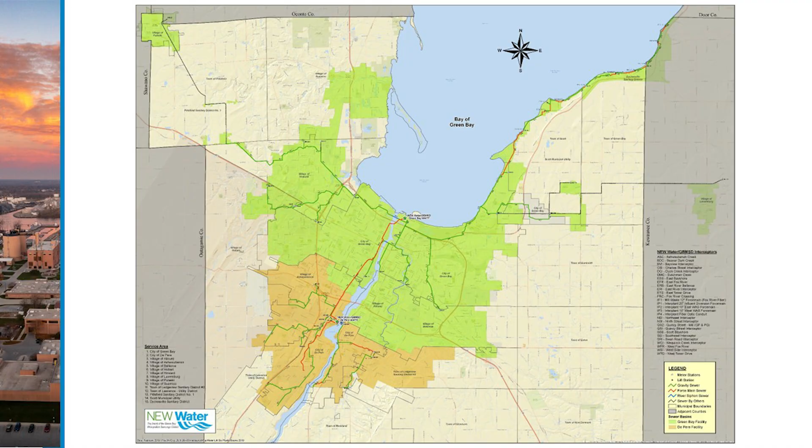So we have 2 wastewater treatment facilities. One is in Green Bay. It's right at the mouth of the Fox River near Bay Beach Road, close to Bay Beach Amusement Park. And then the other is in De Pere. It's between Brown County Fairgrounds and Ashwaubenon Park. The green area is the service area for the Green Bay facility. So it conveys the wastewater to that treatment plant in the city of Green Bay. And then in orange is the area that goes to the De Pere treatment facility.

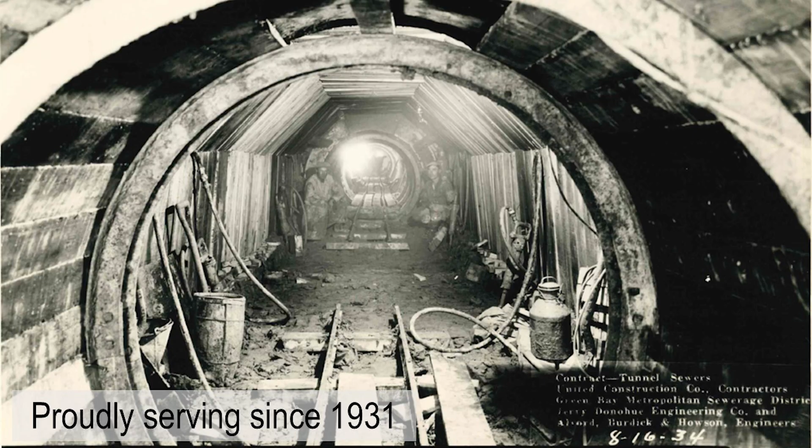So we've been serving this community since we were formed in 1931. And the pipes that we're talking about rehabilitating have been serving almost that entire time. Most of these pipes were constructed in the 1930s. We serve the families, businesses, industries, commercial entities in this area. We do it around the clock, 24/7, 365, despite the weather, and are really focused on the environment and making sure we convey that wastewater, treat it, return it to the environment, meeting our wastewater discharge permit.

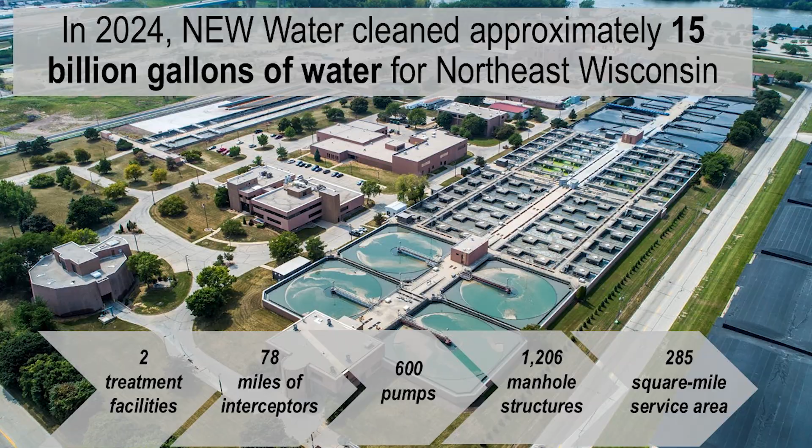So we mentioned the 2 treatment facilities. There's 78 miles of pipes, interceptor pipes, that New Water owns, and some of those pipes are the ones that we're talking about with this particular project. In 2024, we cleaned 15 billion gallons of water. If you think about that volume of wastewater that we treat, it would fill the bowl of Lambeau in about a week. So that's kind of like our average flow rate, just to give you some perspective on that. We are an environmental organization. We are focused on water, and this is our vision, protecting our most valuable resource, water.

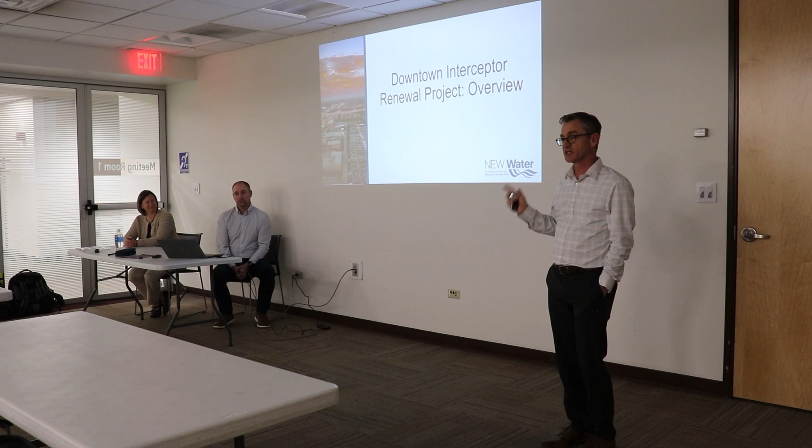So I'm going to turn it over to the folks closer to the project, give you the details that you guys are looking for here. So go ahead, Adam. Thank you. So the Downtown Interceptor Renewal Project. I'm going to do a project overview. So these interceptors are in downtown Green Bay, therefore the namesake of Downtown Interceptor Renewal Project.

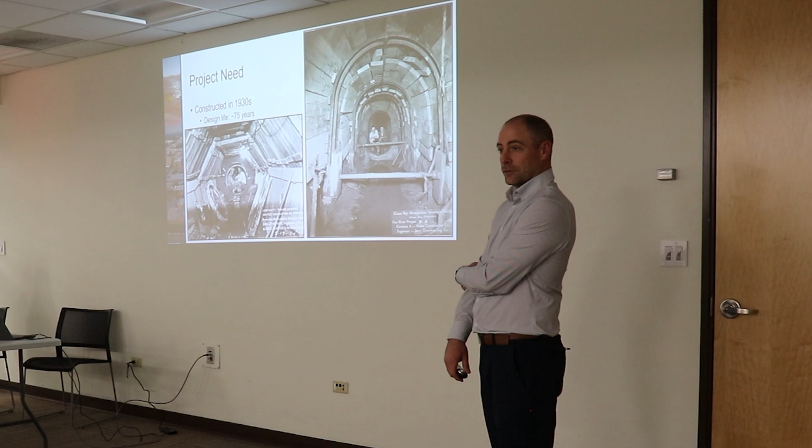So let's first discuss the project need. The interceptor sewers that we're rehabilitating here were constructed in the 1930s, kind of what Nate said. These 2 photos here are actual photos from the 2 interceptor sewers that we'll be rehabilitating. And so you can kind of get a gist of the longevity that these sewers have lasted. The one on the left is the Fox River Crossing interceptor sewer. It was installed in a tunnel, and that's how they did it back then.

A couple guys getting very cozy in a hole together.

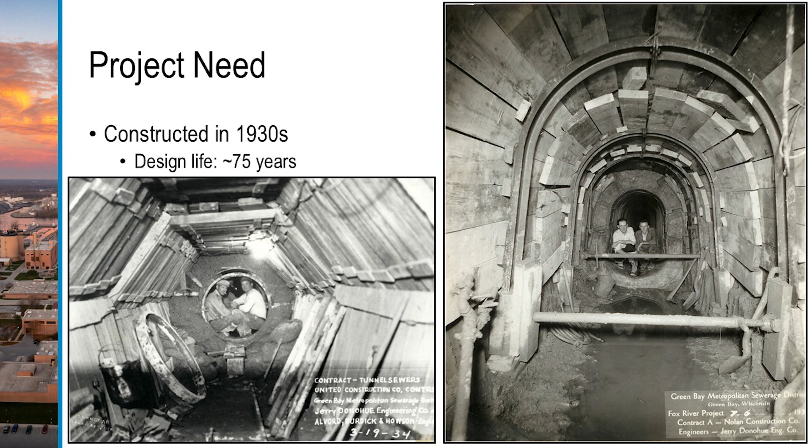The East Fox River Interceptor sewer is here on the right, again installed in a tunnel made of concrete. You can kind of see all the formwork and stuff there. This is actually the outside of the concrete interceptor sewer. So kind of some cool photos there, but it gives you guys a little bit of taste of how old

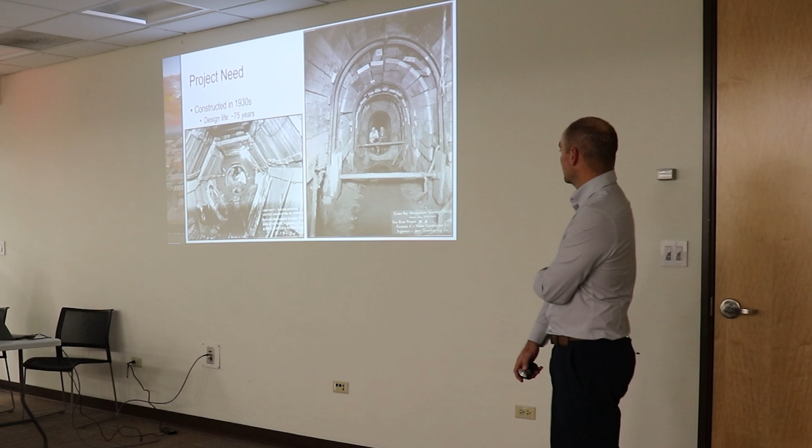these interceptor sewers are. One quick note on that, generally concrete interceptor sewers' design life is about 75 years. So add 75 to that 1930s, we're looking at right at early 2000s is kind of how long they were designed for. So pretty standard in the industry is to see that 75-year lifespan.

There's water coming in, obviously with the East River and the Fox River. There's high groundwater table. That water that comes into the interceptor sewer then flows down the pipe and has to get treated by New Water. It costs a lot of money to treat that wastewater, so we're just trying to get some of that stuff out of there. And then general corrosion. It's difficult to see here, but there's just general corrosion in the interceptor sewer.

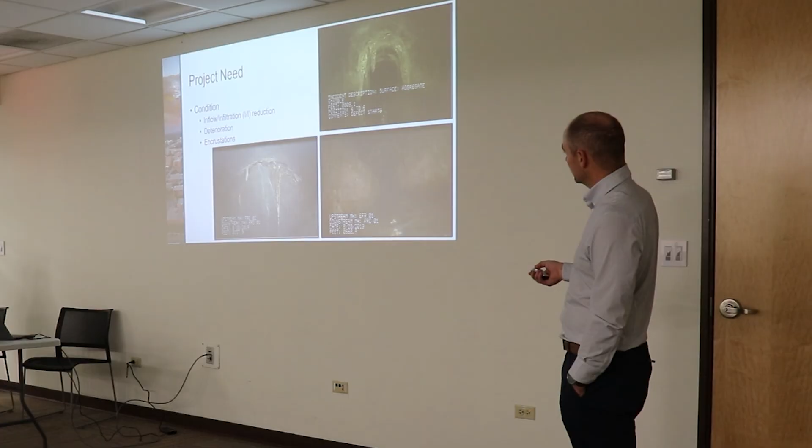So this is that same horseshoe shape. If I go back to this, you can see this horseshoe shape here. This is that same horseshoe shape in the interceptor sewer. And so you can see the condition of the interceptor sewers is less than original condition here.

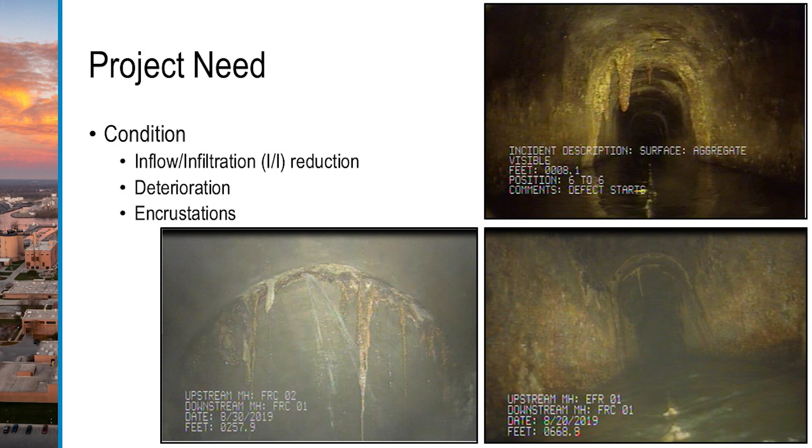So as Nate mentioned, there's 2 treatment facilities. The Green Bay facility treats a portion of that wastewater. These interceptor sewers carry about 65% of the wastewater to the Green Bay facility. And so these interceptor sewers are considered critical because of how much wastewater they convey to the Green Bay facility.

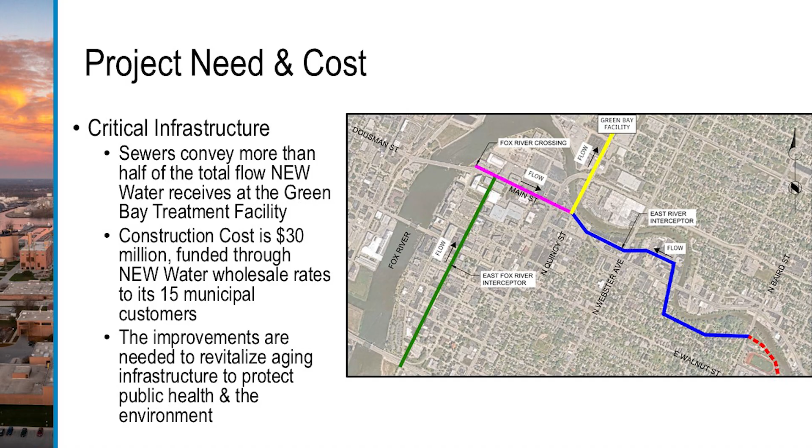High-level notes about construction cost here. It's about a $30 million cost, and that's funded through wholesale rates that New Water charges to their 15 municipal customers. Nate went through those. There was a list of those municipal customers, Village of Allouez, City of Green Bay, De Pere, etc.

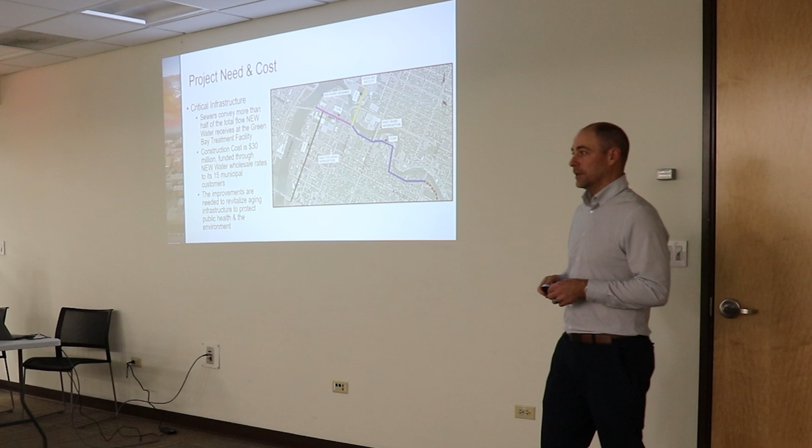And so these improvements are needed to revitalize this aging infrastructure. It's important. If we continue to let them deteriorate, then it would be digging up these interceptor sewers rather than doing a trenchless rehabilitation project. And I'll talk about the means and methods, the methodologies that will rehabilitate them.

So, real quick, let's go over the project location. So there's 3 different interceptor sewers that we're talking about here. They're all kind of in the downtown area of Green Bay. Again, that's the namesake. There's a little portion right down here that's in the Village of Allouez. So the 3 interceptor sewers are the Fox River Crossing Interceptor in magenta, the East Fox River Interceptor in green, and then all of this blue and red is the East River Interceptor.

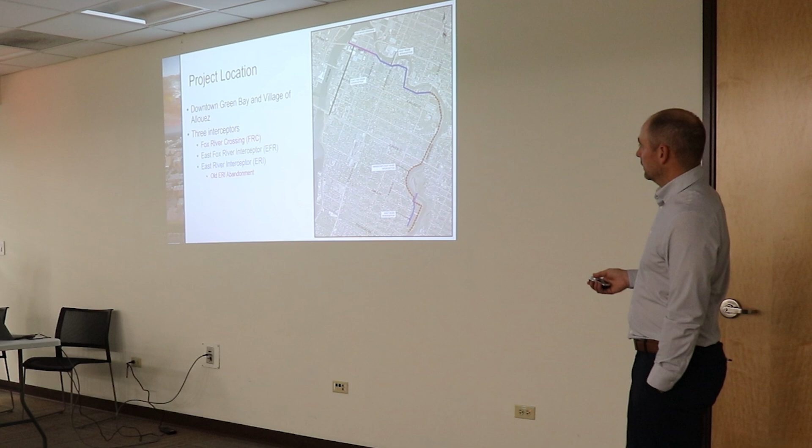The East River Interceptor we split up into 2 different parts. There's the existing interceptor that's currently in use conveying wastewater, and that's those 2 blue portions. We will rehabilitate that. And then there's the old East River Interceptor, which is all in red and parallels the East River. That was decommissioned in the late 1970s when another interceptor was installed.

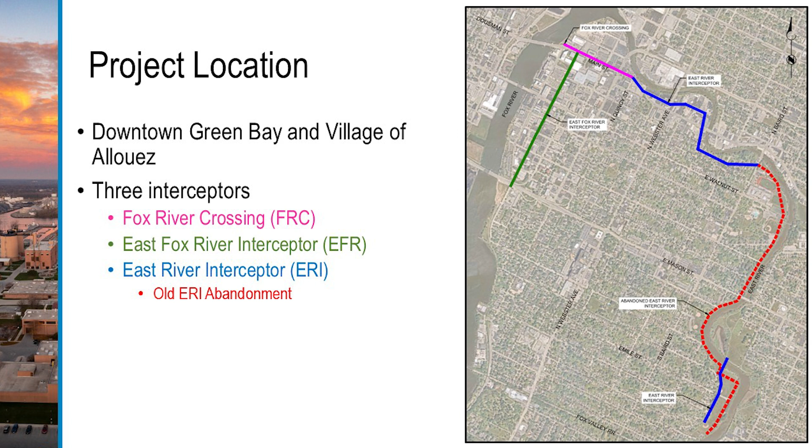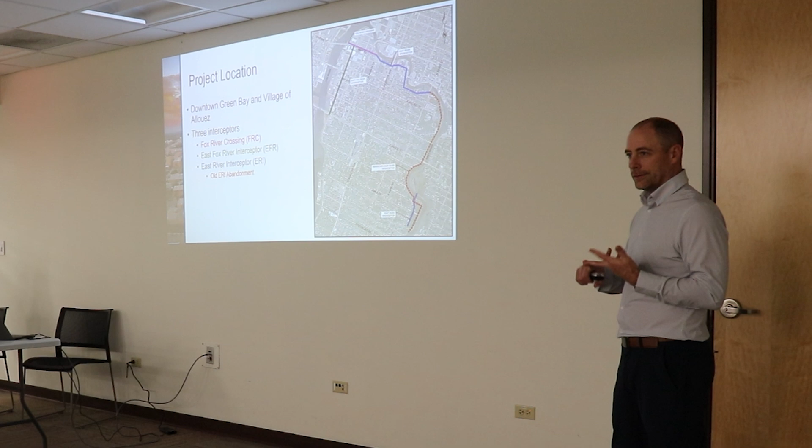The thought at that time was, let's leave this large conduit underground open in case we need to cross a road with another utility, use it for storage. There's a lot of different reasons to use these pipes underground. They were never quite used that way, and so we're just going to go through and properly abandon those. Sometimes you see in the news things like sinkholes. We're going to abandon it so none of that stuff happens. It's a preventative thing that we're going to do.

So, diving a little bit deeper on each of these interceptor sewers. Fox River Crossing, I've got acronyms for all of these things. That's what engineers do, is provide acronyms for everything.

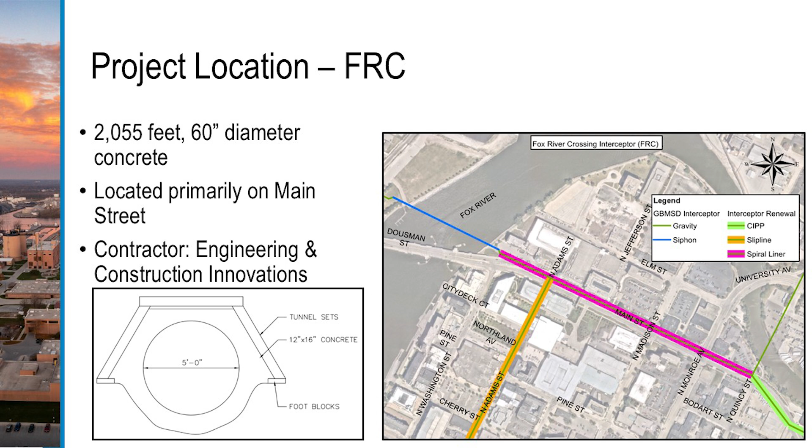So that's again this pink line here. Generally speaking, it's located on Main Street. What we're rehabilitating is about 2,100 feet long. That goes from the Hampton Inn all the way to outside the pharmacy over here, where Quincy Street kind of goes through. Contractor selected for this work is Engineering and Construction Innovations.

As we mentioned, we've got a contractor here, so if we need to answer some questions about some of this, we can do that. And we are going to rehabilitate this with a spiral wound liner. So I'll get into some of the rehabilitation technologies in just a little bit.

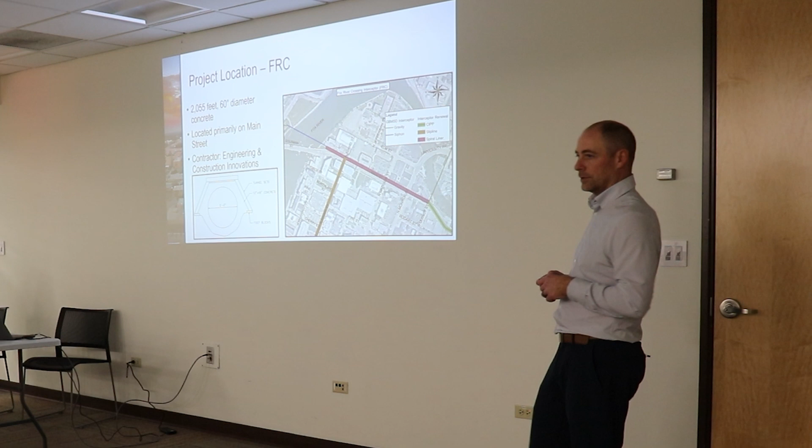The East Fox River Interceptor is in orange. It's all of this. You guys are familiar with this shape of interceptor sewer already. It's a little bit odd for our line of work. It's a funny shape. We're used to circular pipes. It's kind of what we're familiar with.

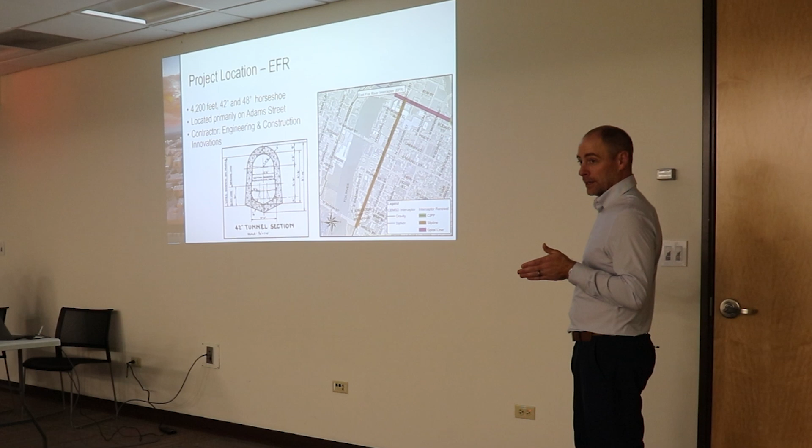This is 4,200 feet long. It's 42 and 48 inch equivalent pipe. The equivalent is just because it's an odd shape. It's actually like 6 feet tall and like 3 feet wide, but that is equivalent of a 48 inch circular pipe. So that is under the west curb line of Adams Street, right downtown.

And what we're working on is from Mason Street all the way to Main Street. So Mason Street is an overpass at that location, and our project goes from there all the way to Main Street. Again, Engineering and Construction Innovations is doing this portion of the work.

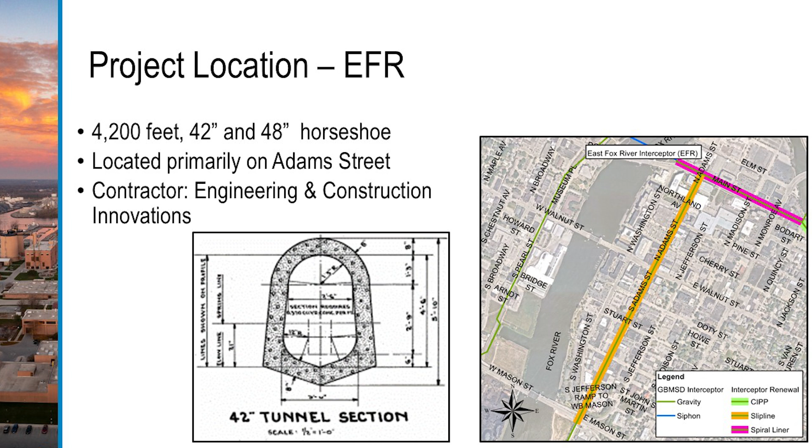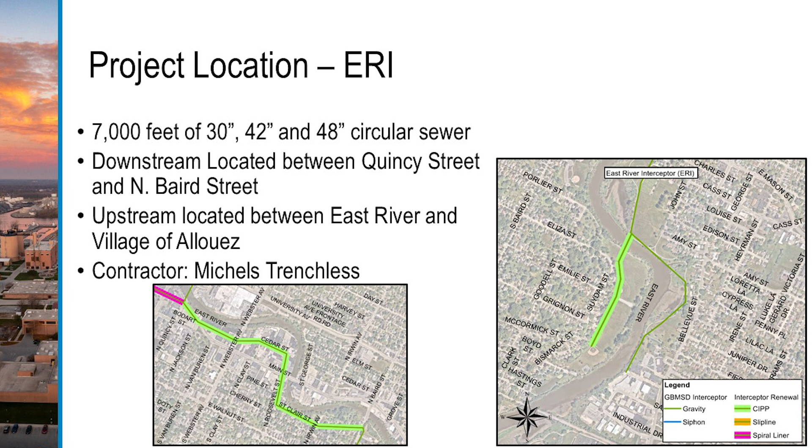Then the East River Interceptor. So again, this is broken up into several different parts here. The green that you're seeing here is about 7,000 feet of 30, 42, and 48 inch pipe. There's a downstream section that goes from Quincy Street all the way over to generally East High School and zigzags through the neighborhood over there.

Then there's the upstream portion. It's primarily in Green Bay and Village of Allouez parks. And this is all going to be performed by Michels Trenchless. And then the abandonment portion of this as well.

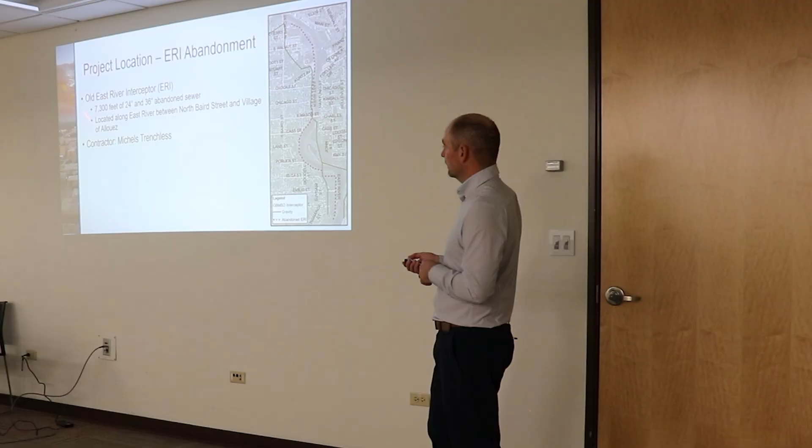So this is, I think it's actually closer to 9,000 feet. And I say that because we added a little bit more that the Village of Allouez wanted us to tack on after this presentation was prepared. So there's 24 and 36 inch sewer that we're going to go and abandon. We're in essence going to find the manholes, abandon the pipe, bury the manholes. And this is, again, going to be performed by Michels.

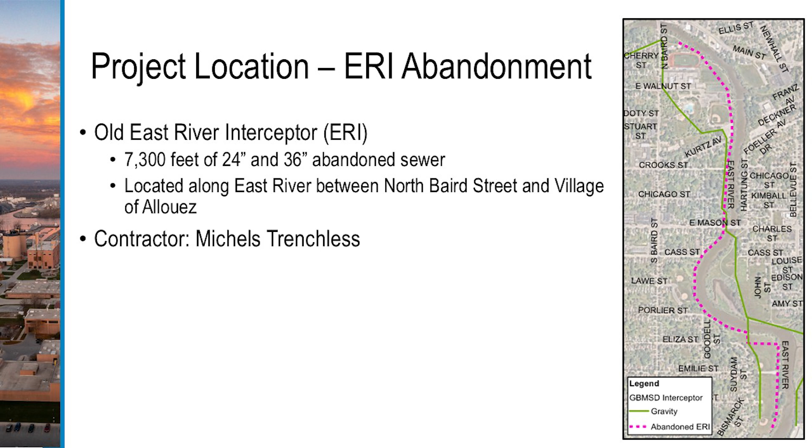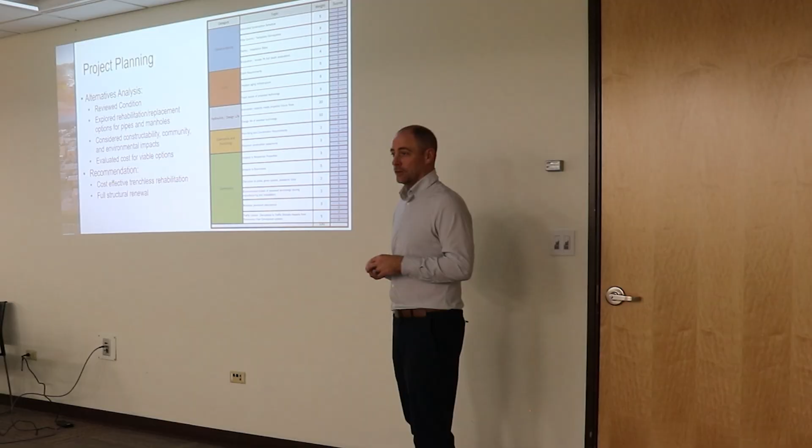So I'm going to get into a little bit of the planning that went into some of this and then the design of the project. So a couple years ago when we started this project, we went through an alternatives analysis to review the condition of the pipe. I showed you some photos of that already. We explored options for both rehabilitation and replacement of those pipes. You know, replacement we try not to do very much unless the pipe is in severe enough condition that it can't be rehabilitated in its existing condition.

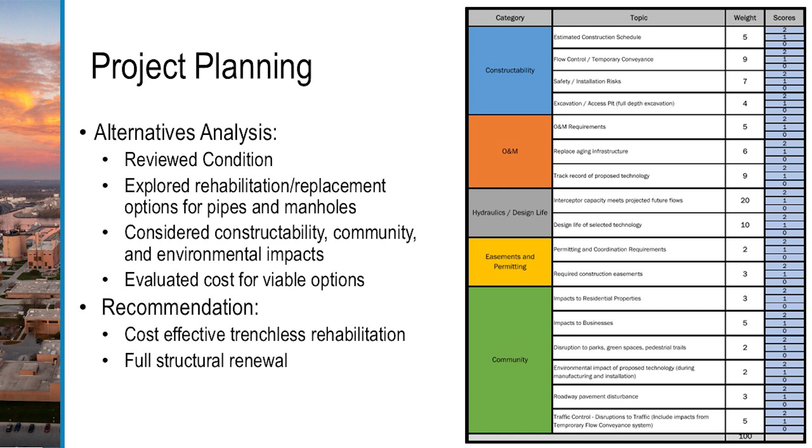We considered a whole bunch of different factors, constructability of those options, a whole bunch of different community factors, environmental impacts that might occur from each option. And we came up with a recommendation, and then that recommendation tied a cost to it. This over here is basically the matrix, all the things that we considered. We worked with New Water to weight that to come to what we thought the best decision was for the community and for New Water.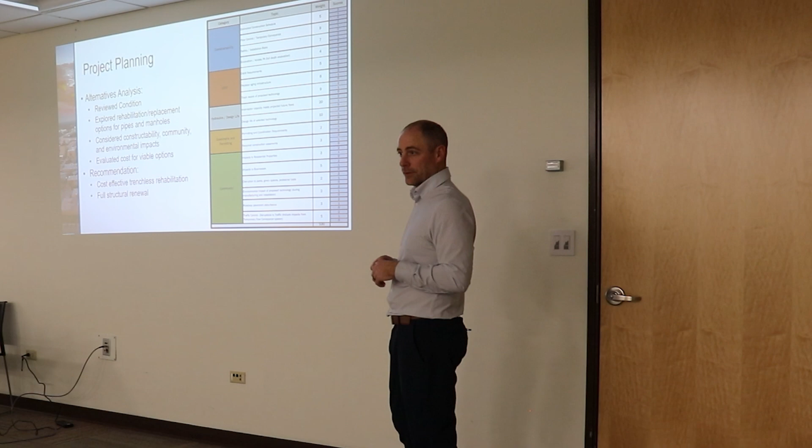So what we came up with was a full structural rehabilitation of the entire sewer system, and we call it a trenchless rehabilitation methodologies. Go into that a little bit here. So for site one, I mentioned we're going to do spiral wound lining. So over on the right would be the existing pipe. And so these pictures are taken from some other stuff. This isn't actually our interceptor sewers, they're just example photos.

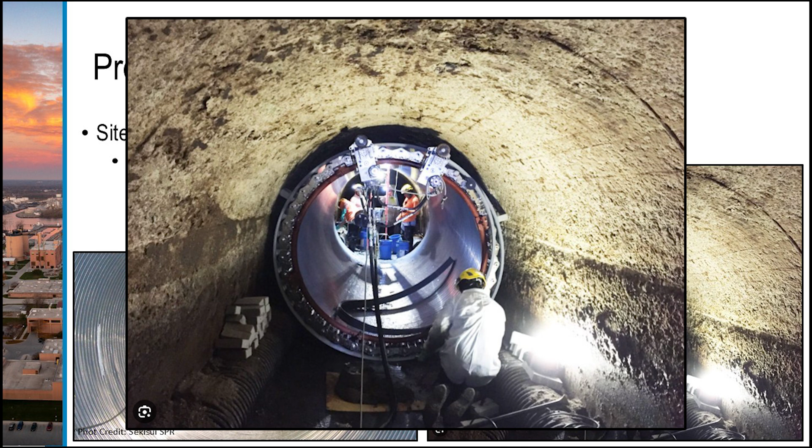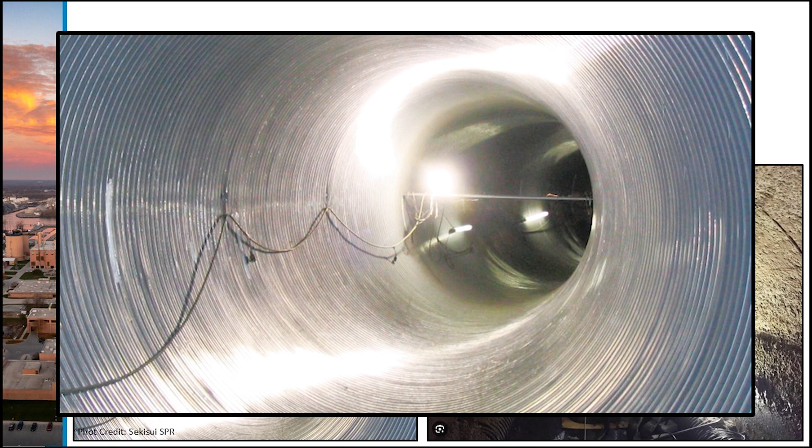But you can see the existing concrete pipe. They take this machine, put it inside the pipe, wind the pipe around, and then this is your end product. And so above grade, you don't see a whole lot of disturbance. Below grade, you basically get like a new pipe that is inside of the pipe.

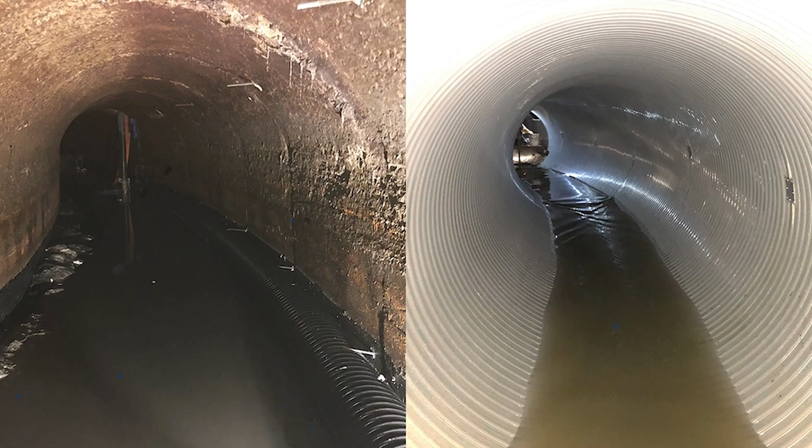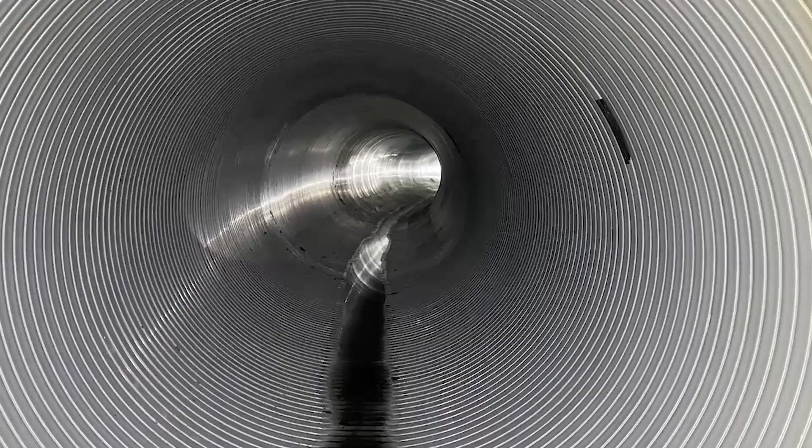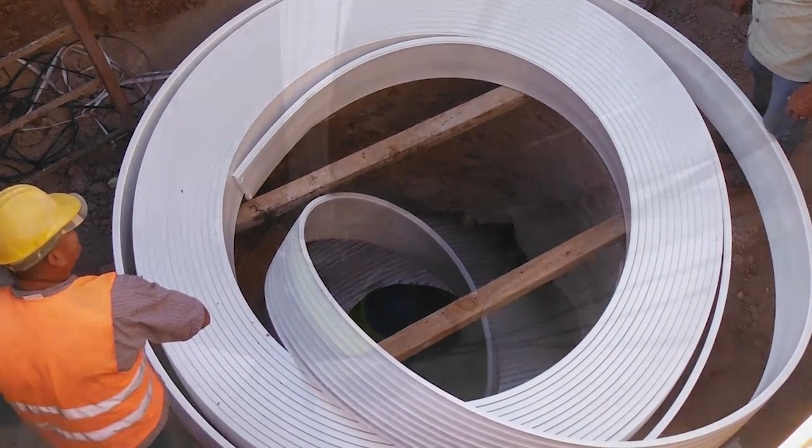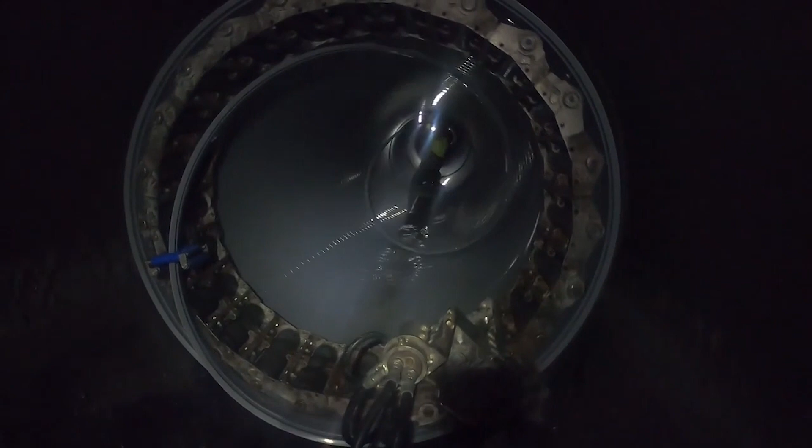Spiral wound lining is a trenchless technology method used to install a lining to replace deteriorated underground pipe without digging it up. In the simplest terms, it is a pipe within a pipe. Here's how it works. A liner constructed from PVC or HDPE is fed from spools through existing manholes or access points into the deteriorated pipeline. From there, the material is mechanically or manually locked together to form a new liner, capable of resisting all applied loads that, depending on the final design and condition of the host pipe, could extend the life of the existing pipeline for up to 50 years or more.

So pretty neat. New pipe inside of the existing pipe. It'll add an additional 50 years or more to the service life of that pipe without digging up Main Street. If you remember, this particular pipe is under Main Street, and that would be very impactful to the community. Okay, so the East Fox River project, I'm going to stay over here for a second because I've got another video.

So we're going to do slip lining of the East Fox River project. And so this is again down Adams Street from Mason Street to Main Street. This is a very straight segment of pipe that's got that odd shape. And so the odd shape reduces the amount of options that we have for a good rehabilitation of the pipe.

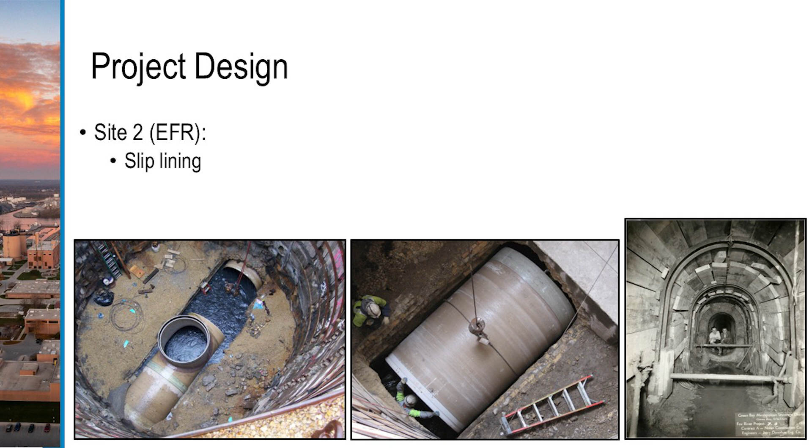Some impacts that you might see with this is, there's going to be a deep pit. Basically dig a hole down to the top of the pipe. We insert pipe, we can push pipe both directions for a couple thousand feet. And so again, it's going to be a fully structural rehabilitation. And here's kind of how this works.

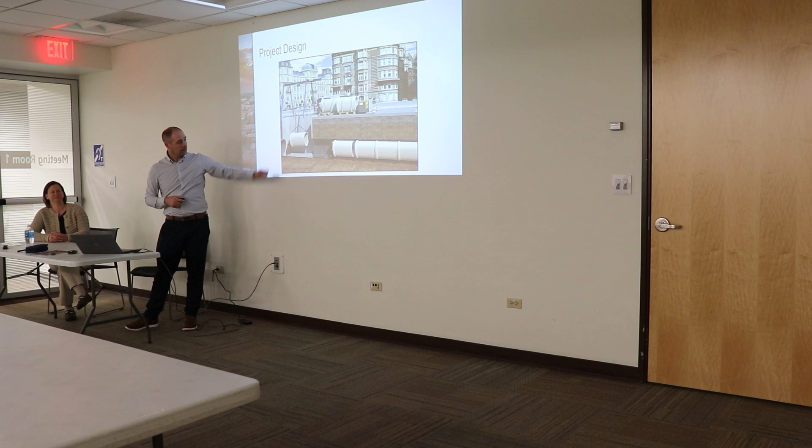So here's the pit that you can see. Dig down to the pipe, take these sections of pipe, push them into place, and it's just like laying a new pipe above grade, because you're pushing it into the existing pipe. And so the primary thing you're going to see above grade is some of these pipe, probably a crane or a backhoe. All the magic's going to happen underground though, and largely you won't see a whole lot of that. There'll be one slip lining pit in Adams Street.

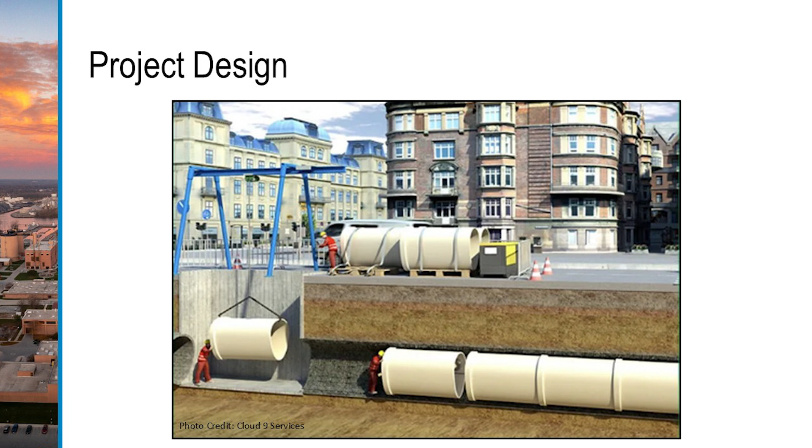4,200 feet of pipe rehabilitated from a single location, which is pretty cool. So, in the East River Interceptor, we're going to do cured in place pipe, CIPP. It's a common acronym in the industry.

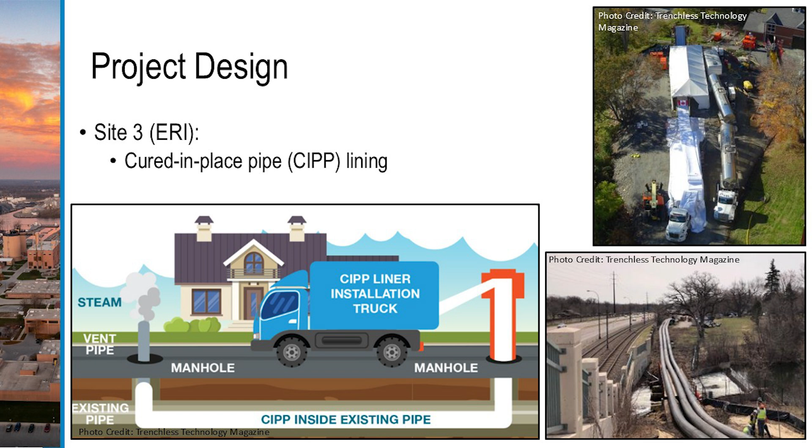Pretty much what happens here is you take a tube. I don't need to explain this. So I have a video of this one too. This is a picture of what happens though. You take this tube, it gets inverted underground. You cure it with heat, hot water or steam or ultraviolet light, and then all of this becomes hardened. And so what you see above grade is like that. And I'll play this video.

CIPP is a method used to replace a deteriorated underground pipe without digging it up. In the simplest terms, it is a pipe within a pipe. Here's how it works. A tube made of polyester felt or fiberglass, designed to the appropriate thickness and length for the application, is saturated with resin. This is also referred to as the wet-out process.

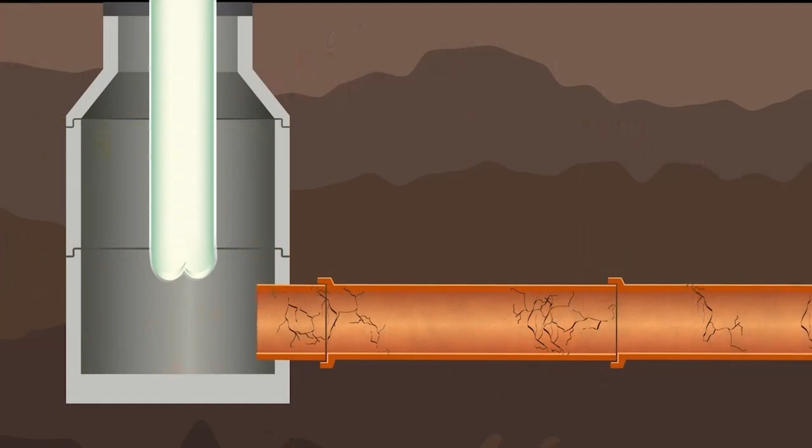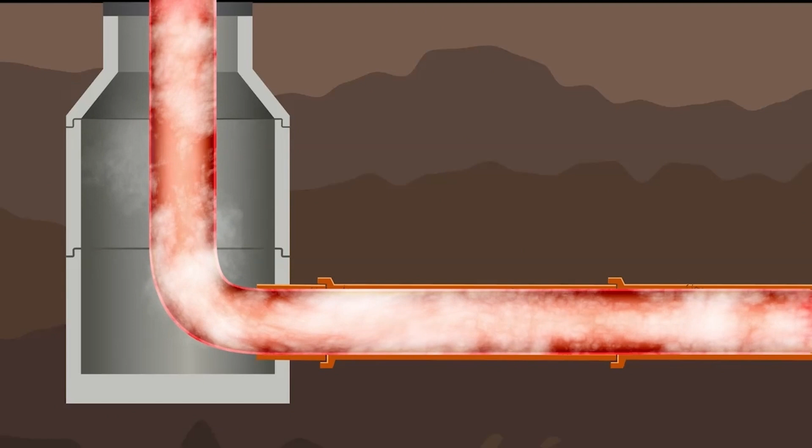The resin-saturated tube is then installed into the existing deteriorated pipe by inverting the tube into position using water or air pressure, or by pulling the tube into place and inflating it. Once in place, the tube is cured or hardened under pressure by using either heat in the form of hot water or steam, or by using ultraviolet light.

So those are the techniques that we're going to utilize on the project to rehabilitate all these pipelines. I want to talk about impacts because that's probably what you guys are here for tonight. So for the Fox River Crossing Interceptor, there's going to be some sidewalk and trail closures. There's going to be some traffic control on Main Street while we do some of this work. You'll see some trucks at existing manholes that kind of look like this. That's roughly the kind of setup that we're talking about.

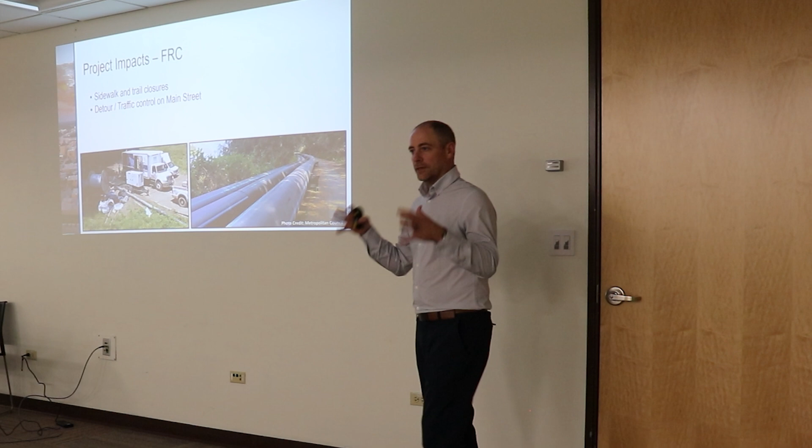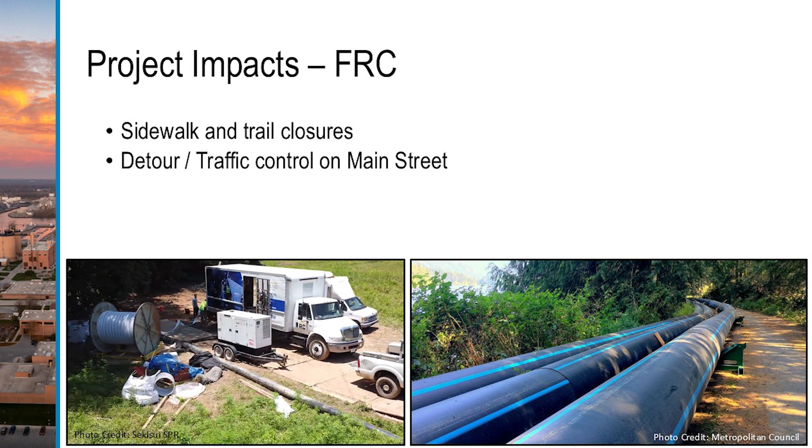And there's going to be some temporary conveyance pipes. Temporary conveyance basically takes a portion of the wastewater that's in the existing pipe, pumps it out so that they can work in the pipe more safely, and then it pumps it over land and will discharge it downstream of the project. So it's basically like dewatering the portion of pipe that's in the middle of that. So those are some things that you'll see on the Fox River Crossing along Main Street there.

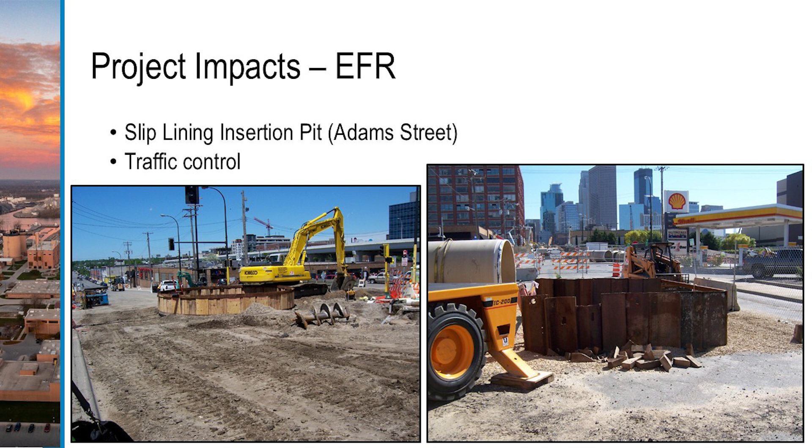Talked a little bit about the slip lining pit. This is kind of what a slip lining pit might look like. There's a couple of different, this is a round configuration here. This is a square configuration. You know, with this type of excavation, you'll have a backhoe that's sitting. And so we're actually going to be installing this in Adams Street. There will be one block of Adams Street that's going to be closed down for a pretty significant time, 6 months or so. So then there's going to be some traffic control impacts with that.

And then for cured in place pipe, again, it's another rehabilitation technology that requires some dewatering. So you'll see temporary conveyance pipes like this above ground. At crossings, we'll bury those. And then there might be some ramps in certain occasions where we'll have to go over top of those pipes. Generally speaking, this is the kind of operation that you're going to see above grade. I showed another picture where there was an on-site wet out. That could occur as well, but I don't think that's fully been determined.

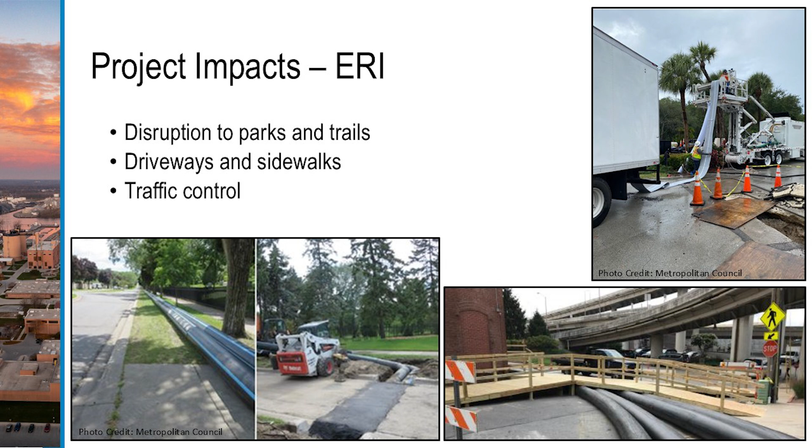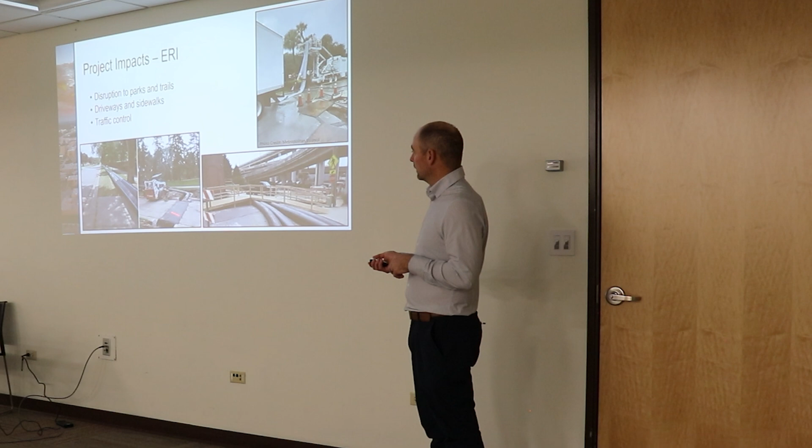So there's disruptions to trails and stuff along the East River. There's trails that go all along there. There's some driveway and sidewalk impacts, they'd be short duration, and then some traffic control that would occur during this work as well. But there's not going to be any stoppage of sewer service. There's nothing like that. All of your sewers empty to the city of Green Bay, which then empties into NEW Water's sewer system. So there won't be interruption to that service. These pipes allow your service to remain.

Real briefly on schedule here. So we have 2 contractors in the room right now. They'll control day-to-day operations and what is most efficient for them to schedule. There's some restrictions based on some customer communications. So we were talking about St. Clair reconstruction briefly. That's going to occur later, but we have some restrictions in our contract that are contractual requirements that the contractor has to kind of work around.

The notice to proceed for both of these projects have been issued. We expect the East River Interceptors to start in June, and then work on the Downtown Interceptors project, which is the Fox River crossing and the East Fox River project, will start in earnest in October of this year, with final completion, restoration, and everything by October of next year, and likely faster than that.

So that's the entirety of the presentation. So we'd welcome questions if you guys have them.